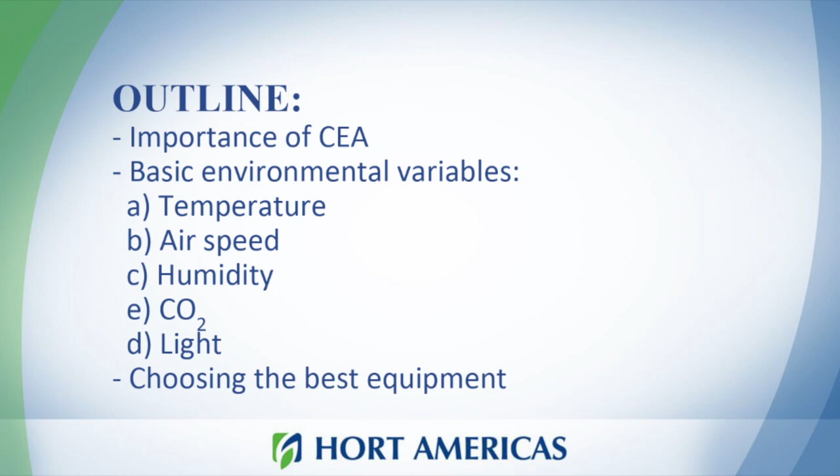So let me explain a little bit about what I want to speak about today. Basically, we are going to learn about different variables that are very important in indoor farming. These variables are temperature, airspeed, humidity, CO2, and light. When we are working in indoor farming, from a greenhouse or different kinds of systems, make sure you know these kinds of variables, because that can make the difference between an investment and a waste of money. So we want to make sure that you know how to manage the system.

I think everyone knows what everyone is speaking about now, like how we're supposed to feed 9 billion people in 2050. That is something that we always hear in every conference related to this field. So in Hort Americas, we know that we have this issue that will happen in the future, but we want to focus on one thing. Why does that matter now? Why is that important now? Basically, we need to make sure now we know how to apply CEA technologies to improve food production. Not only for the future, but also because we want you to be successful now. And later, you can use that success as a tool for tomorrow when we're really going to need that information.

So what is the importance of CEA, controlled environment agriculture? One of the advantages of these systems is that we can farm more in less space. This can be translated to small growers with bigger businesses, which is something really important. And also we can increase the production window. We can have year-round production, which can translate to a lot of food and also annual contracts for all the growers.

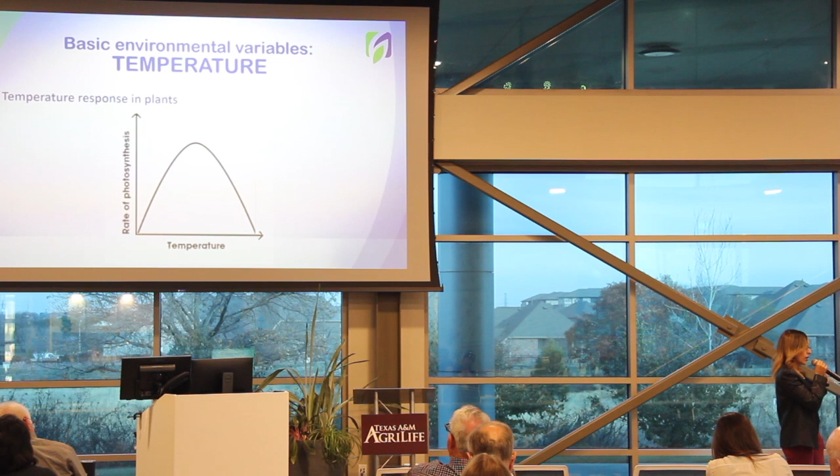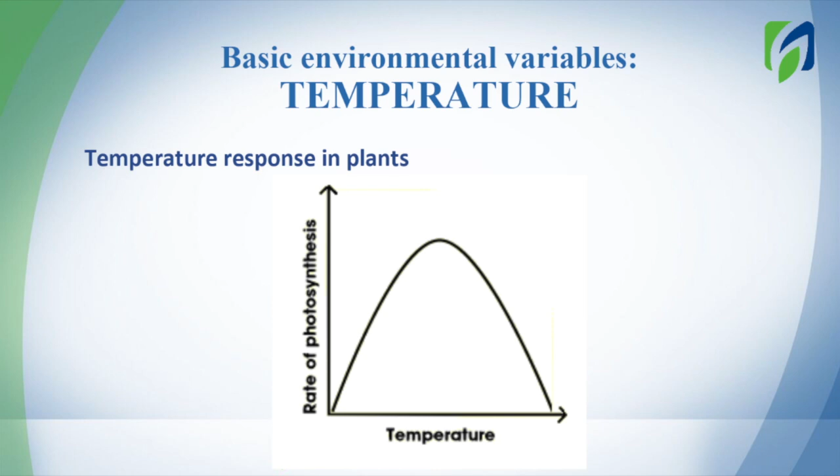So let's start with temperature. Why temperature is important and how can we manage this variable to make sure we can improve the production. So here, in the x-axis we have temperature, in the y-axis we have photosynthesis, how the plant responds to this variable. When we start to reduce temperature, the first thing that will happen in a plant is that we are going to start to reduce the metabolism. That is the first response that we will have. After that, obviously we will have stress and the plant will eventually die.

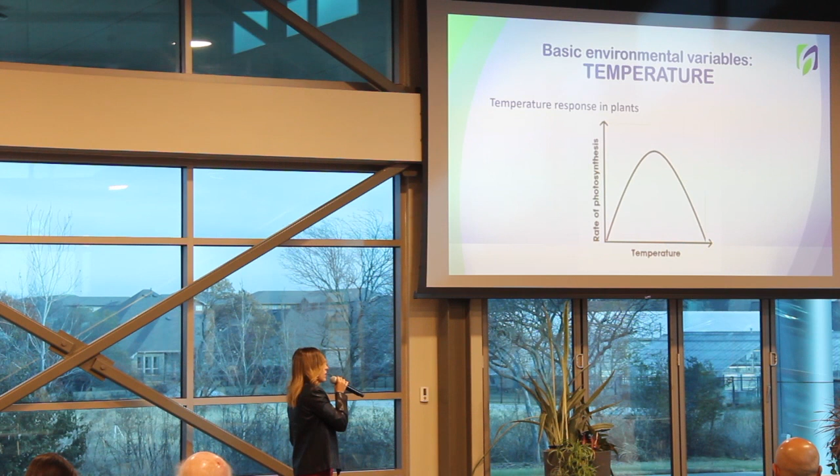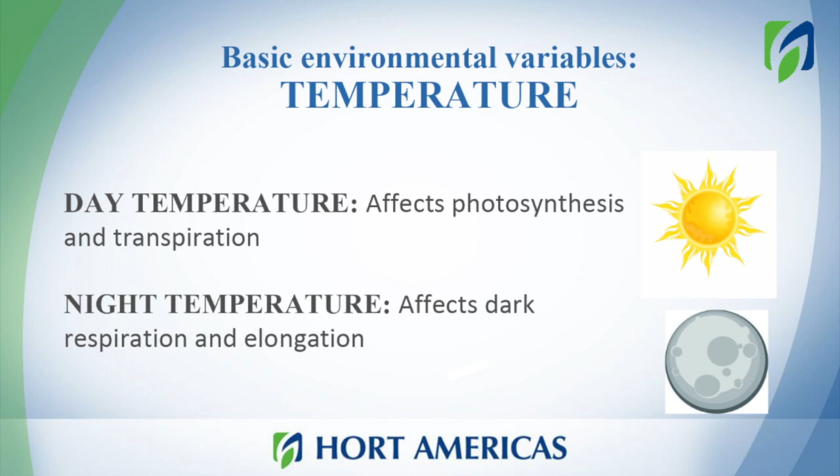What happens on the opposite side, if I start to increase temperature? The first response that the plant will have will be to increase the metabolism. After that, we will have stress, the proteins will stop working, and then we will have problems. So we can separate temperature response into parts, like day temperature and night temperature. Day temperature will affect photosynthesis and transpiration, and night temperature will affect dark respiration and elongation.

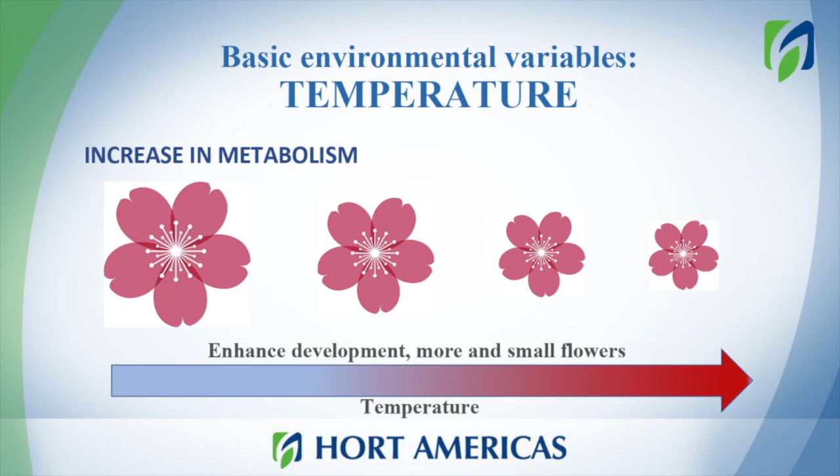So what happens on the other hand when we start to increase temperature? Then we will have an increase in the metabolism. This is something that we don't really want, because the response of the plant will be to enhance the development. This means that the plant will start to make more flowers, for example, but the energy is the same. The plant is just working more. So we will have more flowers, but the flowers will be smaller. And if we have small flowers, we will have small product, which is something we don't want. So make sure that your plant is always within the recommended range of temperature.

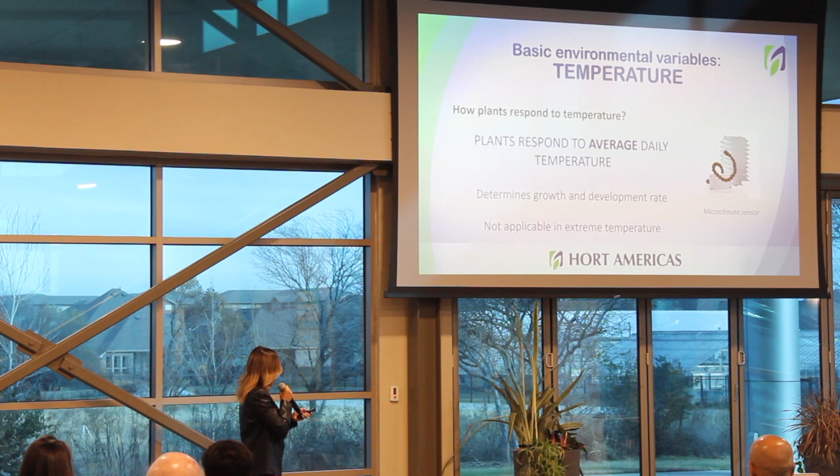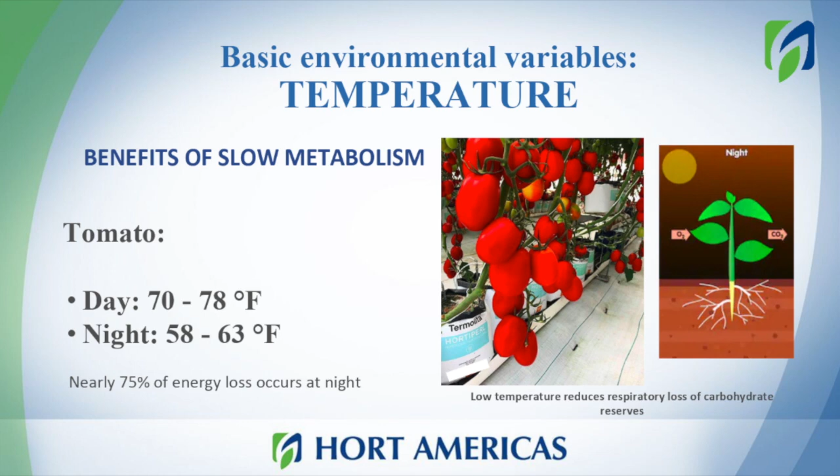And it's also very important to know that plants respond to average daily temperature. This means plants will respond to the temperature they have through the whole day, and then change the way they work. So you need to be sure, for example, if you apply this treatment to tomato, that your average will be within the range that is recommended. Because if you have a lower average, then you will start to reduce the development of the plant. That means that we will probably have more days to harvest.

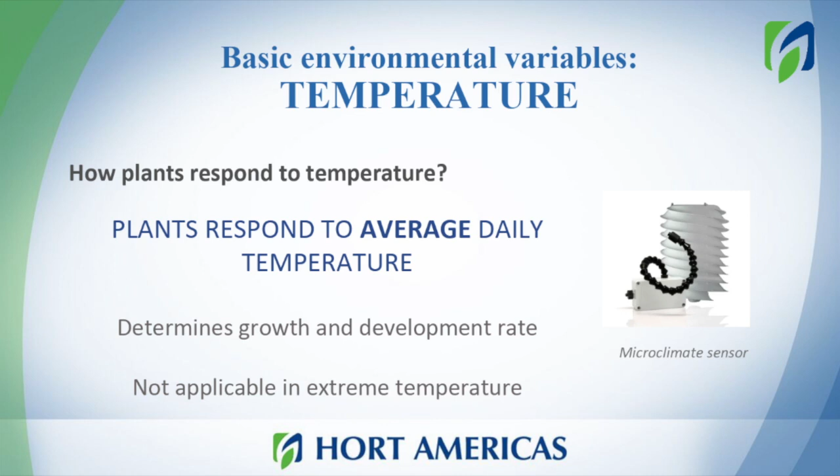So always remember the plant will respond to average temperature, and that can also help you to manage your system to make sure that plants get the average temperature that they need. That can be something you can manage if you have, for example, a cooling system, and you know how to play around with the temperature, so at the end of the day you have the temperature that you need.

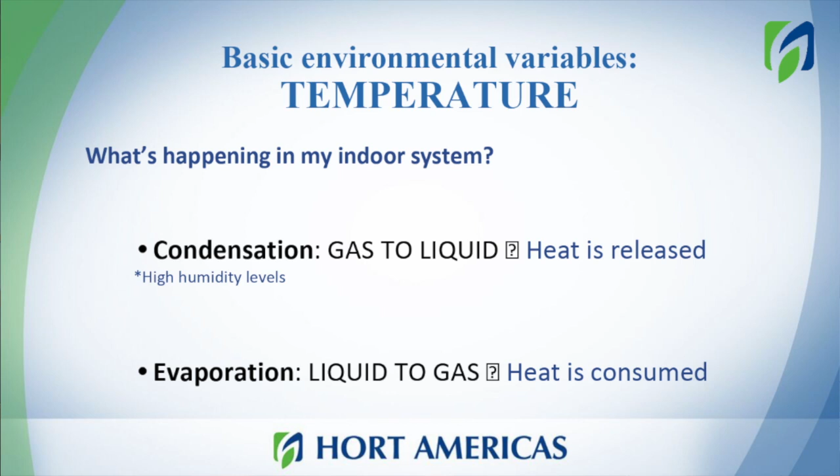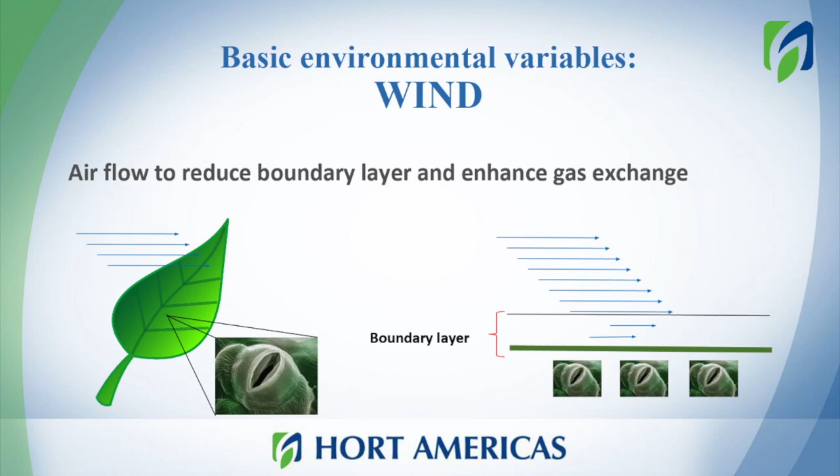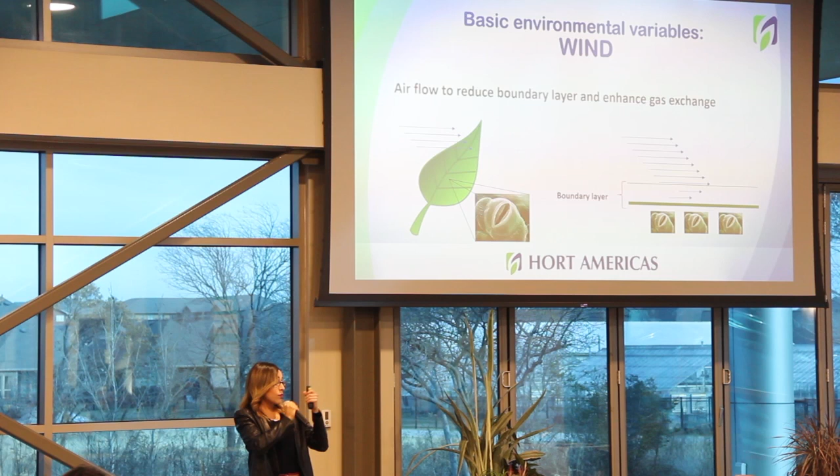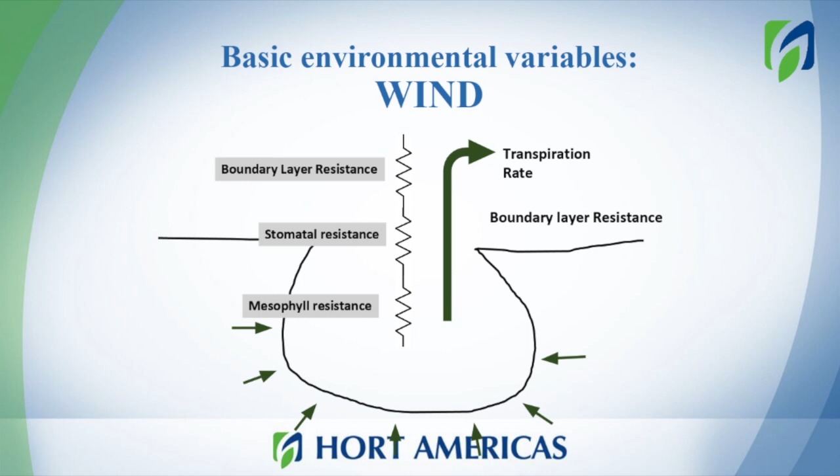Which means that the stomata that are trying to do this gas exchange to make photosynthesis and also transpiration will have problems doing that gas exchange if we have a big boundary layer. So in here we have a stomatal cavity. In the stomata we have different resistances, but the boundary layer is a resistance that we can easily remove. How can we remove the boundary layer? By applying ventilation.

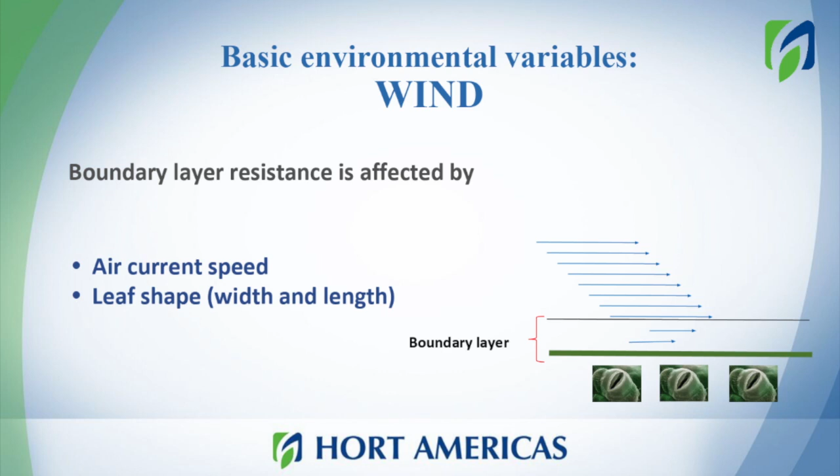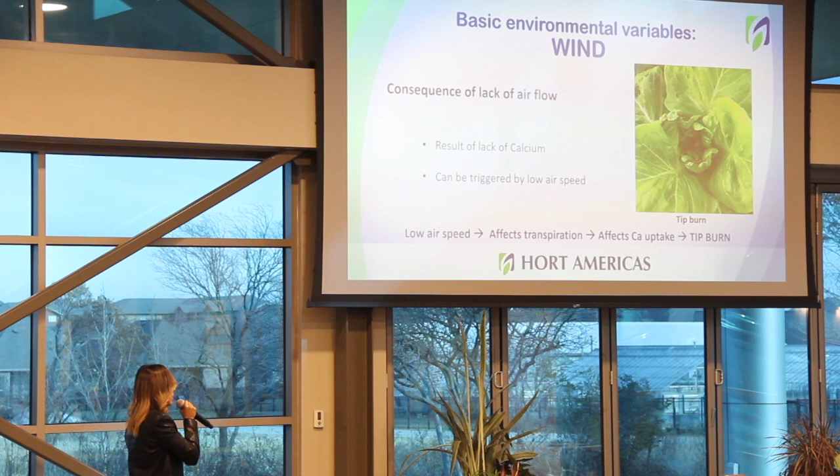So the boundary layer will be affected by the current speed of the air that you have inside of your system, and also the leaf shape, or even the shape of your crop. For example, a crop that is very common in having this kind of issue is lettuce. Lettuce is a crop where all the leaves grow together, and the new leaves are just in the center of the plant. So because of the shape of the crop, we have a big boundary layer.

If we have a big boundary layer, which means we don't have good airflow over the canopy, this can cause tip burn. Tip burn is a deficiency of calcium. The deficiency of calcium will occur at the center of the plant. You will see dead tissue. The function of calcium is to be part of the cell wall. If we don't have enough calcium, the cell will form, but the cell wall won't have enough calcium to be formed, and then it will die. So we will see this symptom, which is really common in closed systems for lettuce production.

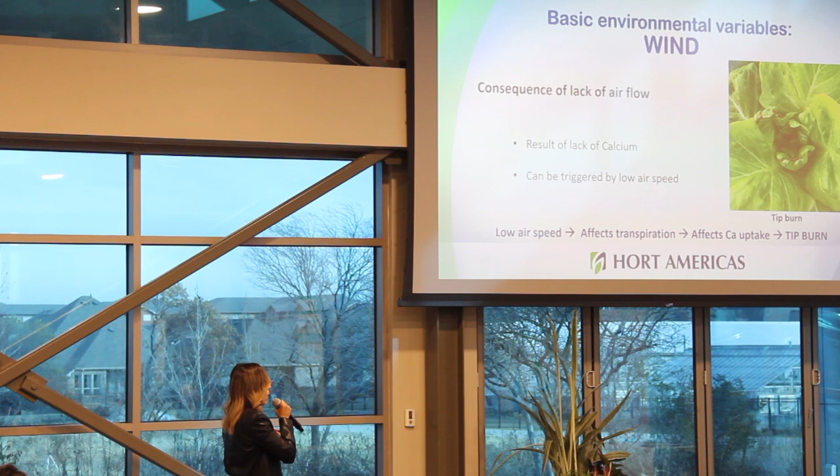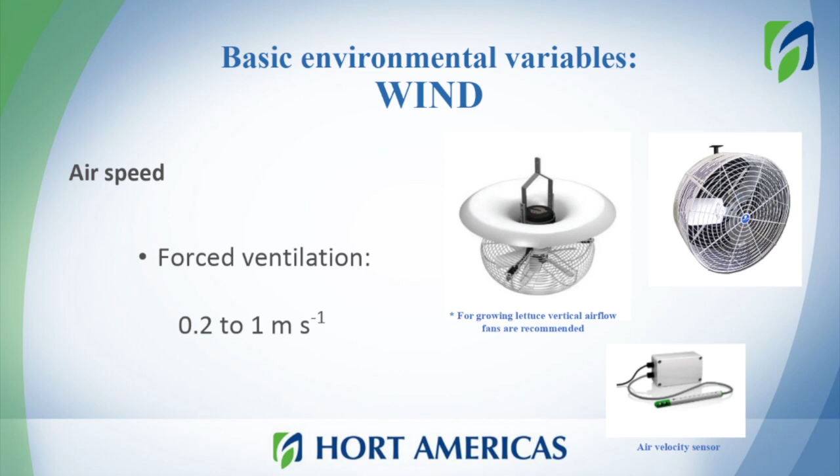So how can we reduce or solve this issue? By applying good airflow over our canopy. In here I am showing different kinds of fans. This is a vertical fan that will provide wind to lettuce in a very nice way. And this is a regular fan that is just horizontal. If you use this kind of technology, you will reach about 0.2 to 1 meter per second of air velocity, which is what we need to at least avoid tip burn in our lettuce. And there are different kinds of sensors to track this variable. By the end of the presentation, I will speak a little bit about this.

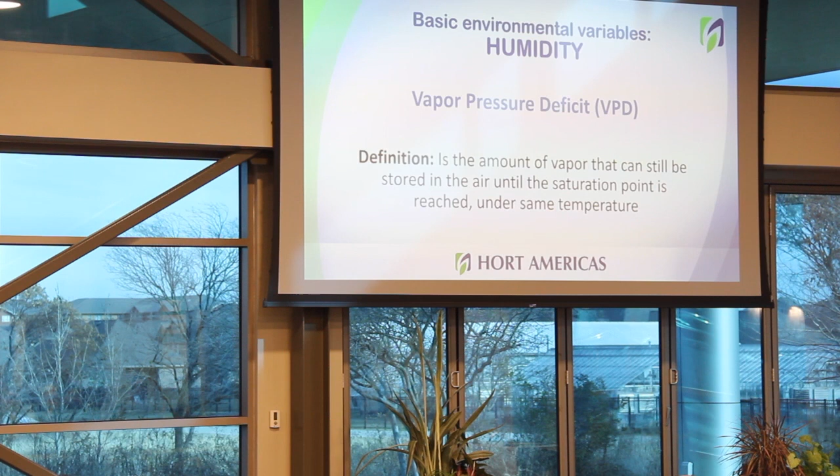So now humidity. What is important about humidity? In this section, I will speak about VPD, because I know that a lot of growers don't have a lot of knowledge of what VPD is or how to use it. Vapor pressure deficit, or VPD, is the amount of vapor that can still be stored in the environment before reaching condensation.

Why is it used by growers? This measurement is used by growers so they can know how much humidity they can apply to their system before they start to see drops of water, and that is something you really don't want, because if you have drops of water in your system, you will have fungal attack. This is something really bad. So we always need to make sure the humidity is within the range of the crop that you are using. And by tracking the VPD, you will know how much humidity you can still put into your system.

So the VPD correlates directly with transpiration. If you have a higher VPD, you will have more transpiration, which is also important, because when the plant is transpiring, that means the plant is healthy, the plant is moving water, the plant is moving nutrients.

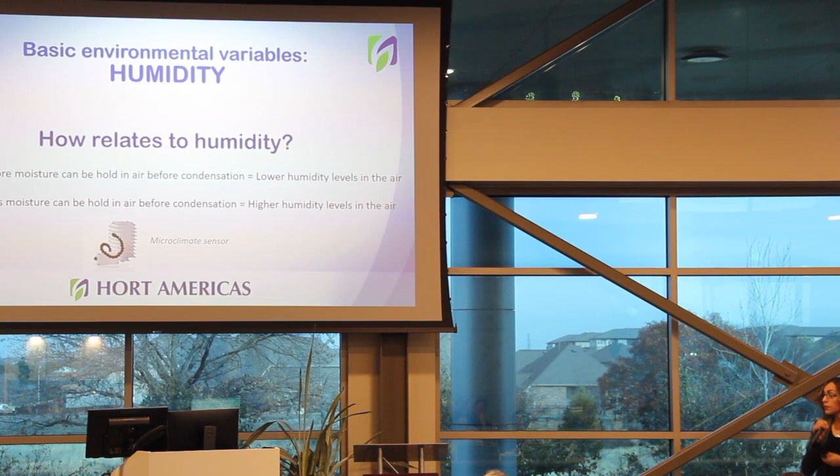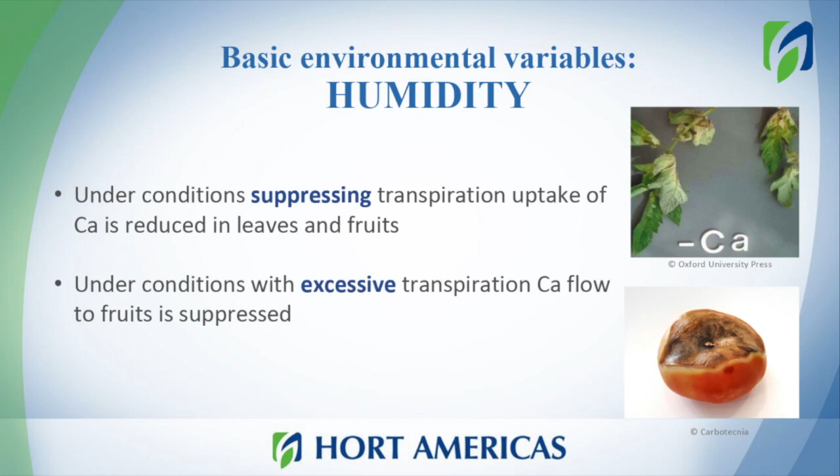If we have conditions that are suppressing transpiration, that will mean that the plant won't move any water, or will move less water. If we have less water moving in the plant, that means that we have less calcium moving in the plant. Calcium in the plant moves within the water. So if water is not moving, calcium also won't move. So under this condition, if the plant is not transpiring, then the water won't be taken up by the plants, and we will have a lack of calcium in leaves and also in fruits.

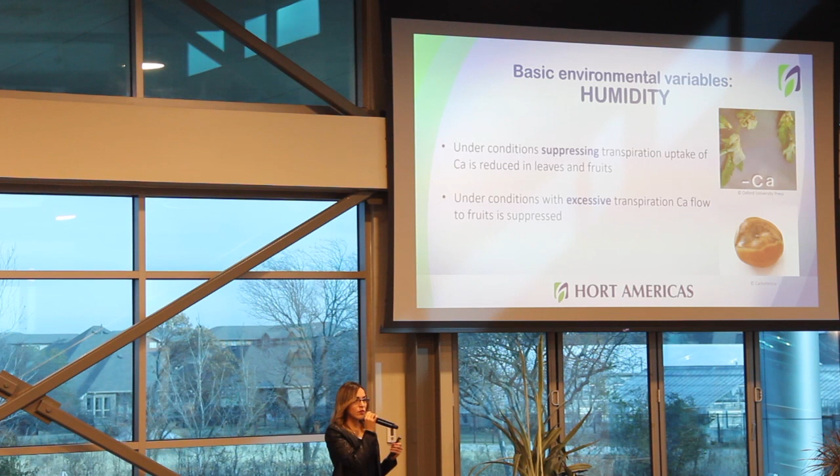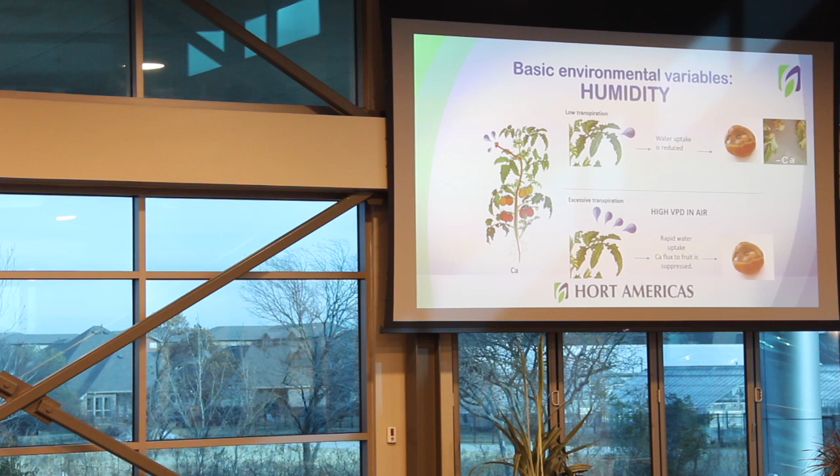But what happens when we have an excess of transpiration, when we have too much transpiration in the plant? Then the movement of water will be so quick that the calcium will reach only the leaves, and we will not have calcium in the fruits. So in here I can explain it better. If we have low transpiration, that would mean that the water uptake will be reduced, and also calcium will be reduced. So we will have the symptoms of lack of calcium in the fruit and also the leaves.

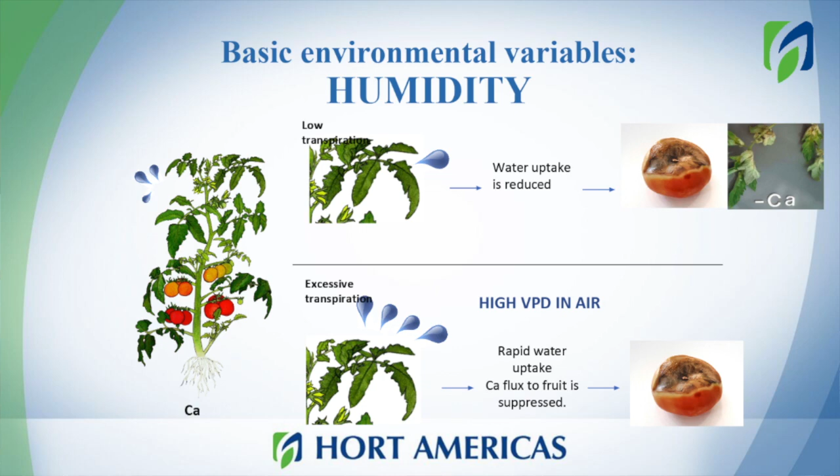And when we have an excess of transpiration, the water will move so quickly that the calcium will go straight to the leaves and will avoid the fruits. So in this situation, we will have the symptoms only in the fruits. So it's very important to pay attention to your crop, because as you can see, these two problems are very similar, but the way we solve this issue is completely different. So moving to CO2. CO2 enrichment, yep.

Can I ask a question? Yep. Is VPD the measure that you use, or do you use percent humidity? And then how good is the... You can use both. You can use VPD or percentage of humidity. Both can tell you the same information, right? Can you repeat the question, please, so everybody can hear? Yeah, so the question was whether we use VPD or percentage of humidity, which variable should we track? We can track both. Both variables will tell us the same thing, so we can use both. And what was the second question, sorry?

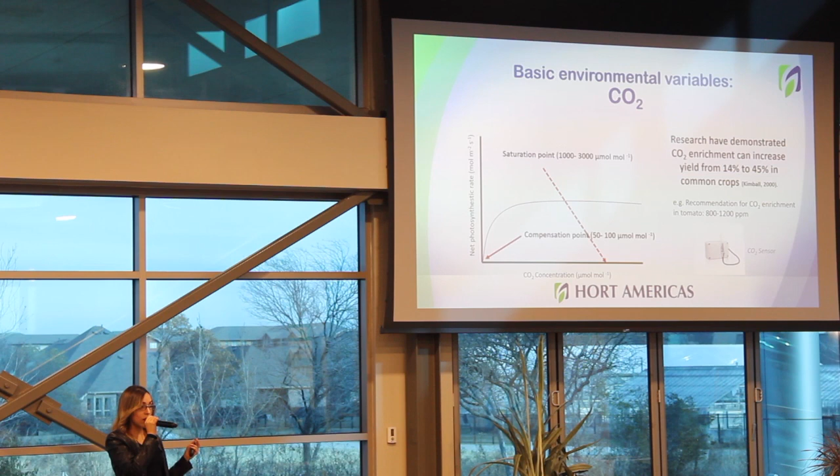How many plants do you know the optimal humidity for growth? How good is the data out there? So the question is, how good is the data to know the level of humidity plants will need? We have a lot of information about the humidity different crops need. So you need to focus on your crop. I can tell you an average percentage of humidity, which is from 60 to 70%, but that will be different between the crops. For example, strawberry needs more humidity, like 75% humidity at night. So you need to focus on the crop and then do some research about it. There's a lot of research out there. We can help you with that.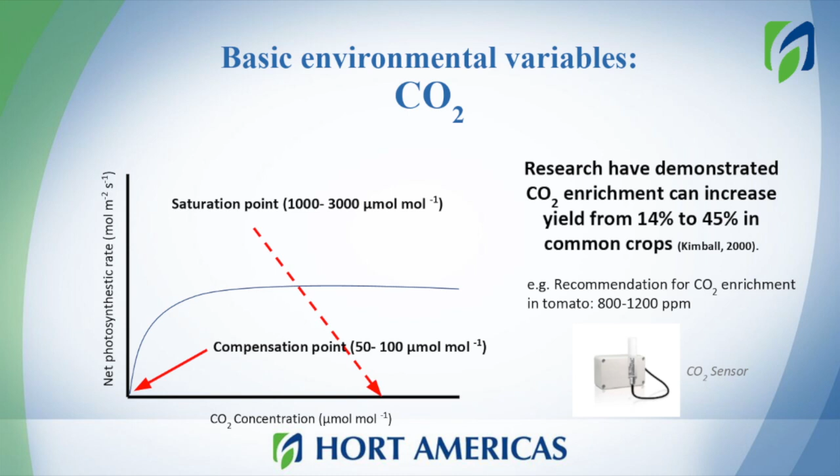So well, moving to CO2. In here we have a graph where we have on the x-axis the CO2 concentration, and on the y-axis the net photosynthetic rate. Not all systems need CO2 enrichment. That is something important to know. But with CO2 enrichment, research has proved that we can have more yield. So the thing that we need to know is that plants have a compensation point.

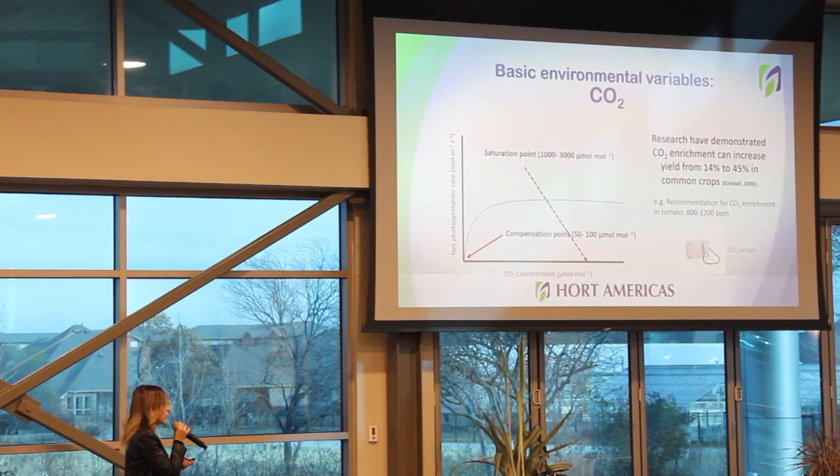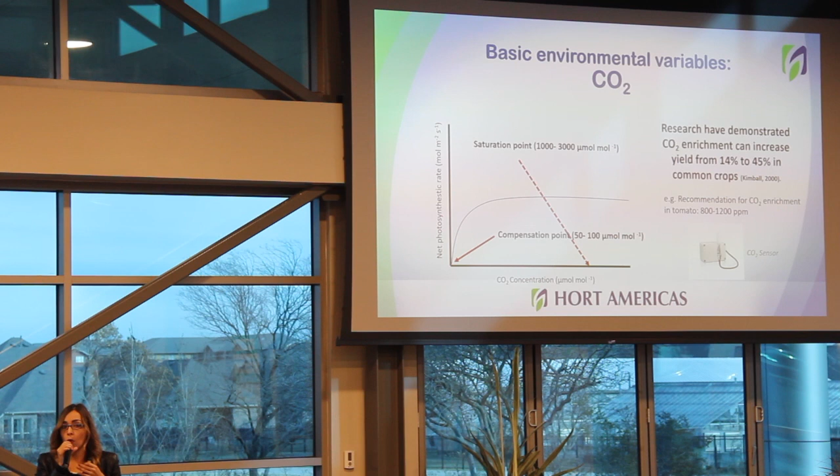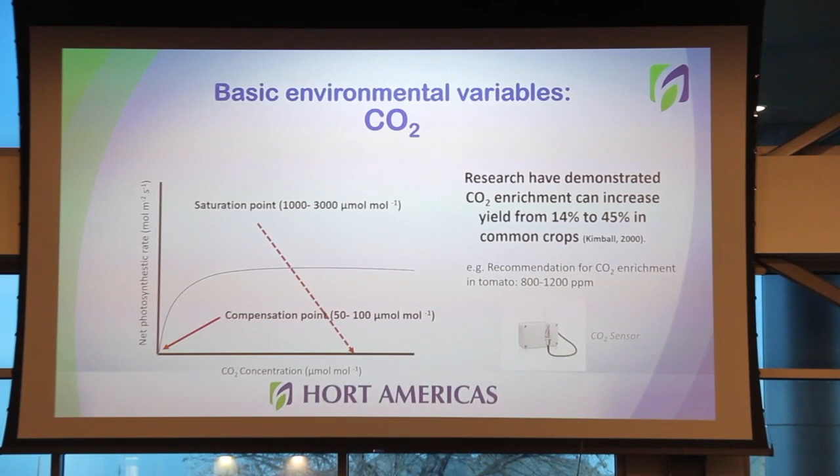If you have levels below 100 micromoles per mole, you will probably have issues in your plant. And there's also a saturation level, which means that if you keep increasing the CO2, the plant won't do more photosynthesis. And there are recommendations, for example, for tomato: usually in greenhouses, they apply CO2 enrichment to try to reach 800 or 1,200 ppm of CO2.

And now speaking about light. Remember, we have a special talk for light, so I will just go briefly over this topic. So in light, all the plants, all crops have a minimum light requirement. And this minimum light requirement can be tracked by a variable that is called DLI, which is daily light integral, how much light the plant gets.

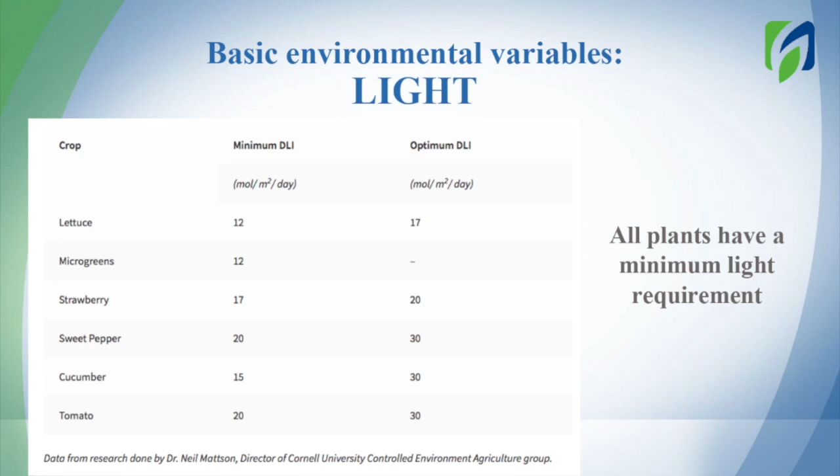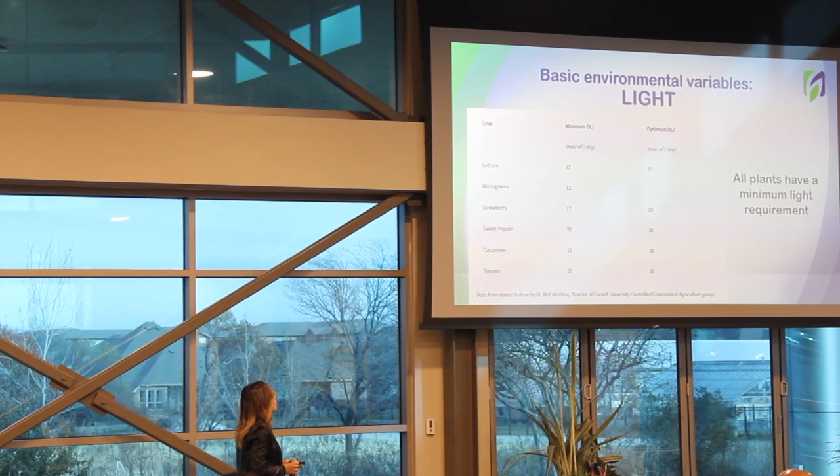So in here I have a table, and we have the minimum and optimal levels for very common crops like lettuce, microgreens, strawberries, sweet pepper, cucumber, and tomato. So all plants, all crops have a minimum and optimal level. So how can we use this information?

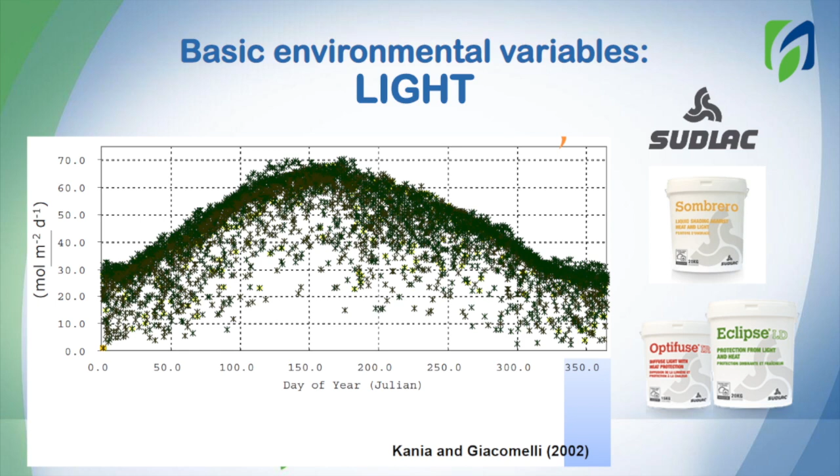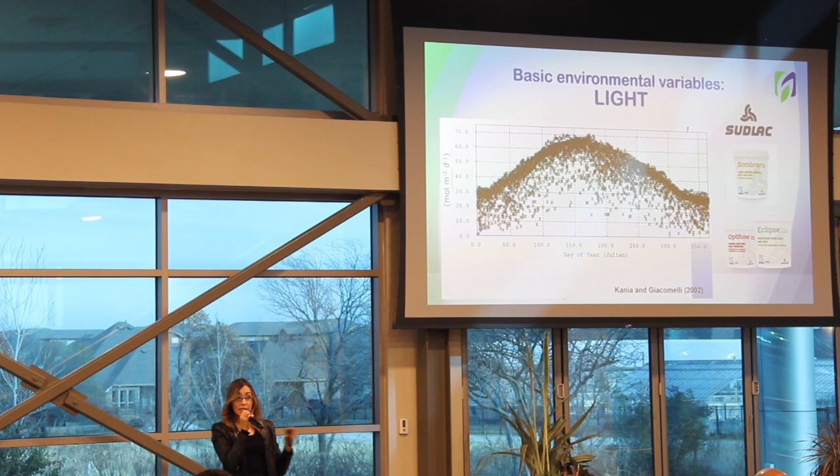So if you have, for example, in here, a DLI of 60, that means that you have a lot of light that is only heating your greenhouse. You don't need that much light.

So now let's move to the products. What we have to offer to track all these variables.

Oh, sorry. Does the type of light matter? The question was if the type of light matters. Yes, of course it matters. That is why we have a lot of artificial lighting right now. But I will leave the presentation of light, because I know that the Dr. will speak about the light. But yes, usually colors like red and blue are very important for photosynthesis.

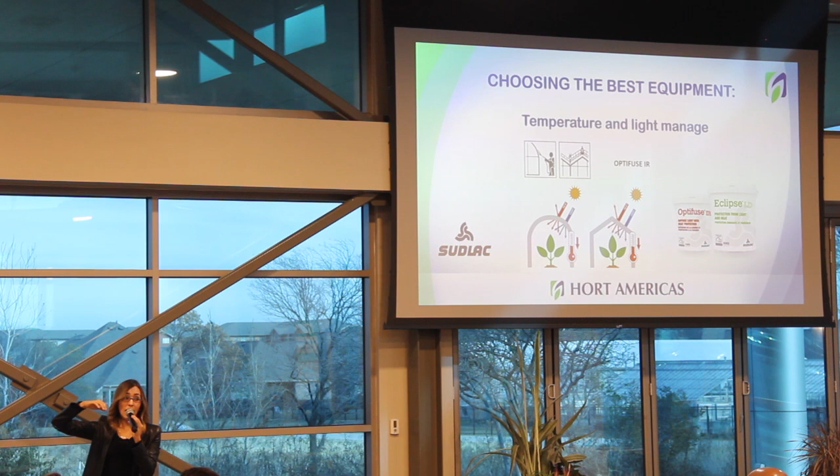That means that you will have diffuse lighting inside of your greenhouse. Diffuse lighting is really good for tall crops, because when you have a tall crop, you have multiple levels of canopy. If you have direct light, the light will only reach the upper part of the canopy. With diffuse lighting, light goes in all directions and reaches the lower parts of your canopy, and you avoid your leaves being hit directly by the sun. So diffuse lighting can also reduce that issue.

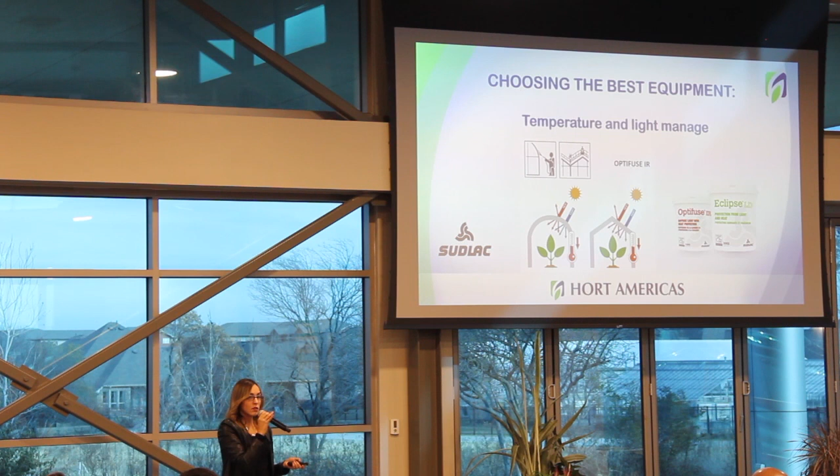You can achieve that with OptiFuse IR. Something important about this product is that you get all the light, but you won't get all the heat. All the short radiation of the sun will be reduced, so you will avoid overheating the greenhouse.

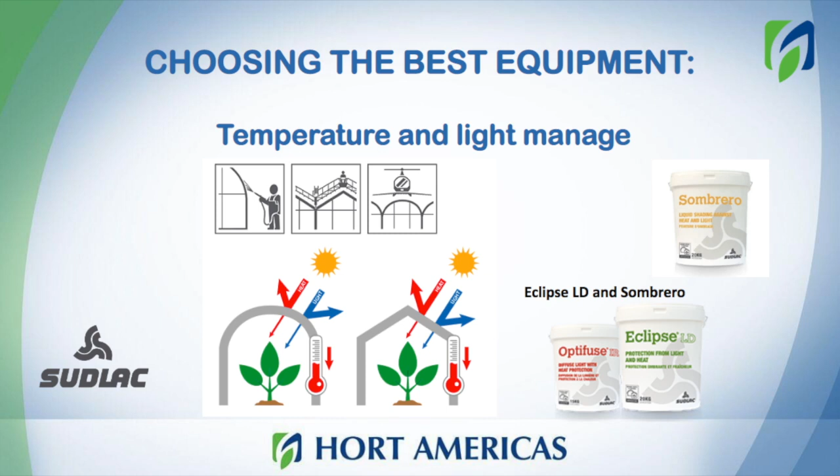We also have other kinds of products like Eclipse LD and Sombrero. Both of these products will reduce the amount of light you're getting and also the amount of heat. This works like a shade cloth, but you still get better light entering.

And of course we have artificial lighting. That's very important, as someone asked me. Light spectrum is really important for our plants, and there's a lot of research out there about how colors affect plant growth. We can offer multiple types of lamps. These lamps here are for top lighting, which means you can use them for indoor production or as supplemental lighting inside your greenhouses.

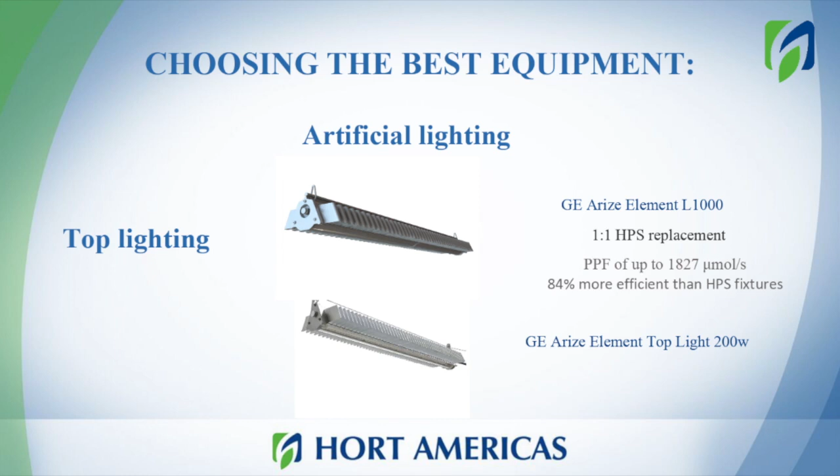We have the Arize Element L1000. This is a replacement for high pressure sodium lamps because of the light quality, and it can provide more than 1,000 micromoles. It's also obviously more efficient because it's based on LEDs, so it's more efficient than high-pressure sodium lamps.

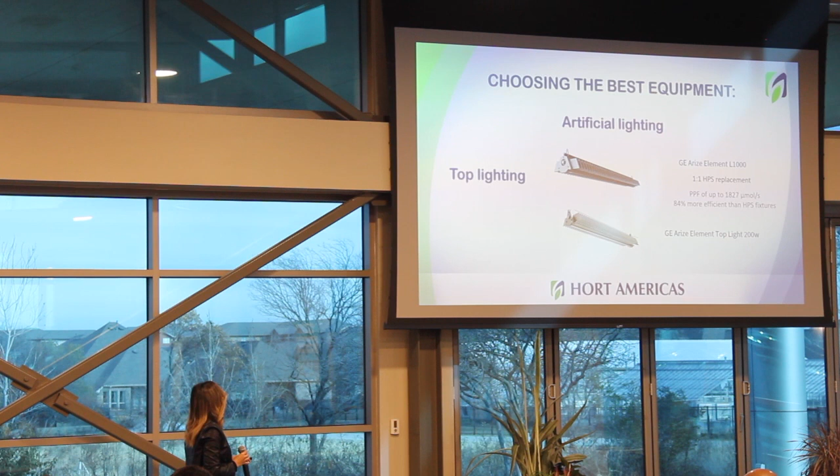We also have high-pressure sodium lamps, like the GE H1000. This kind of light is very nice. It has more than 10,000 hours of light, and the light output is higher—you can get more than 2,000 micromoles per second.

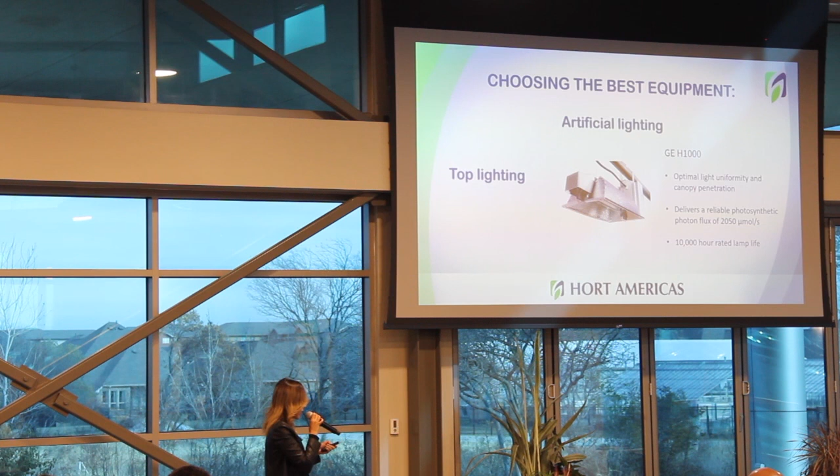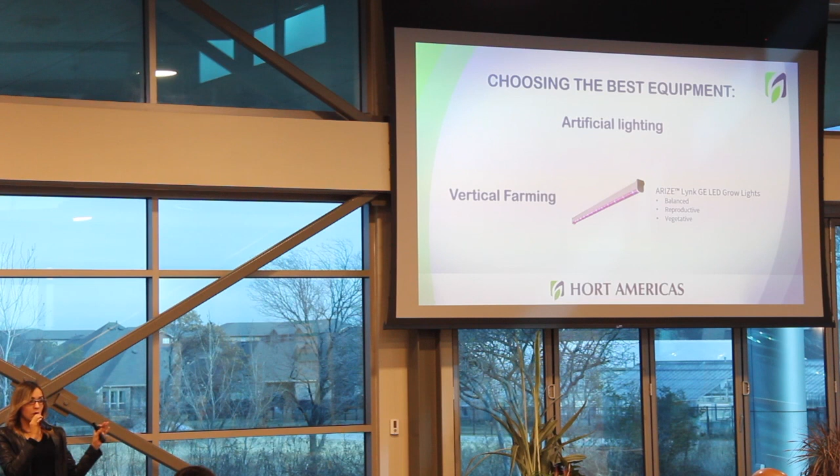We also have lights for vertical farming, so if you're planning to grow lettuce, microgreens, or other leafy greens—the crops usually grown in vertical farming—we have multiple options. If you reach out to us with the crop you want to grow, we'll get you the information you need to select the best light quality for your crop. Whether you're growing microgreens, transplants, or other crops, plants respond very differently to light colors, so we want to make sure you get the light quality the plants need for the production you want.

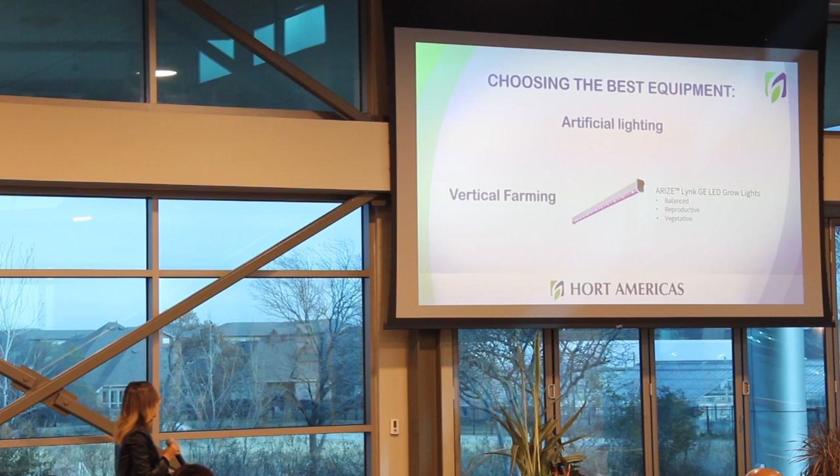We have all kinds of products for hydroponics and greenhouse production. If you are doing hydroponics, we can have something for you. Reach out to us and we can share information about the products you'll need. We have, for example, nutrient solutions for leafy greens, both traditional and organic. We have different kinds of substrates, and different kinds of pots for hydroponic production, like for strawberries.